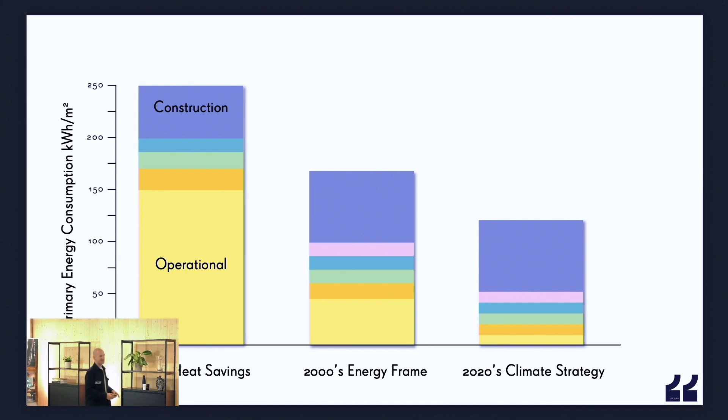And this is a conversation which has been going on for some time. This is not a new thing that's just dropped into our laps. And in the 1970s, so I understand, the conversation was really about operational carbon. So that's about the carbon that we use to heat and to cool and to light our buildings.

And did somebody just put, oh yeah, he did. He didn't pour it out.

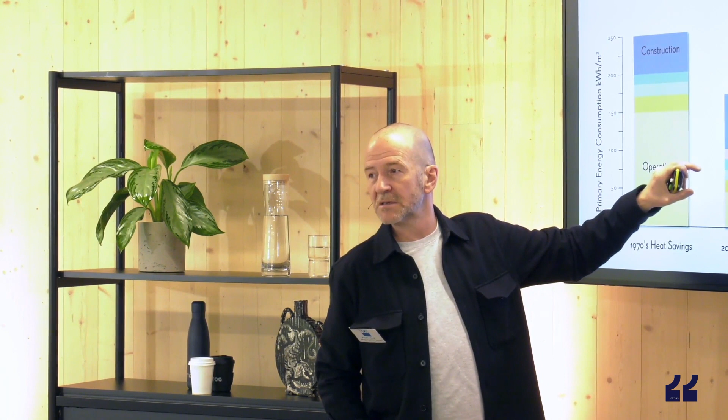So the operational carbon, we got pretty good at saving that with double glazing and with insulation and all those kind of things. And actually now, our building regulations are pretty good for air tightness, for insulation, for double glazing. And our operational carbon, the amount of carbon it takes to heat and light the building, cool the building, has gone right down. And by the 2000s was a much smaller element of the carbon burden of a building over its lifespan. And that's over a typical 60-year lifespan. 50 years in Europe, so I understand anyway.

And then in the 2000s, we really started thinking about on-site energy generation. So solar panels on the roof, the odd windmill, maybe some geothermal, that kind of thing. And again, as our grid has decarbonized, as we've got better understanding of where it's appropriate, when's the right time to do it, we've got pretty good at that. And now in the 2020s, we find ourselves with the operational carbon being a relatively small part of the carbon burden of a building over its lifespan.

But actually, as you can see, the construction part of that's got bigger since the 70s. It's got bigger because of all that insulation and the double glazing and everything else. And now in the 2020s, that's become more than 50%. For a 10-story multifamily residential building, about 60% of the building's carbon burden are the materials and the construction process of building that building.

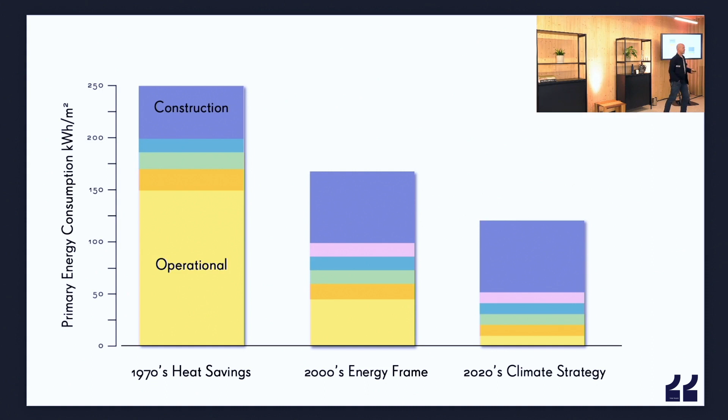But all of our regulation, all of our planning law, all of the things that we award through LEED and BREEAM and all those other things, are focused right down here on this little yellow line. So what we had been thinking about as a practice for some time is how we can begin to reduce this burden, how we can think about the buildings that we need to build and reduce the amount of carbon that we use to do that.

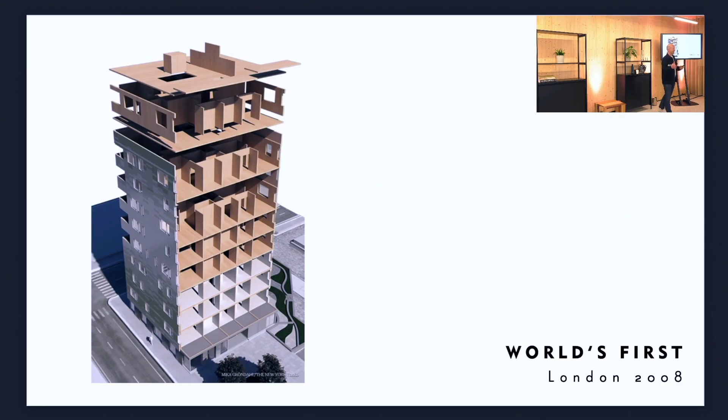And for us, we built our first CLT building, the first one in the UK, in 2003. Then we built another couple of small ones, a house extension, a little private family house. It's just gone on sale, actually, funnily enough. And at the same time, bubbling away in the back of our heads was this notion that this could be a viable alternative to concrete and steel, a structural system that we could use for high-density housing in our cities.

And in 2007, when our industry was building the Olympics, the price of steel and the price of concrete rocketed, and our clients began to look for alternative methods of construction, different ways of building things. And so we were able to successfully suggest to our client at the time that we look at building this out of timber. And so we drew two buildings.

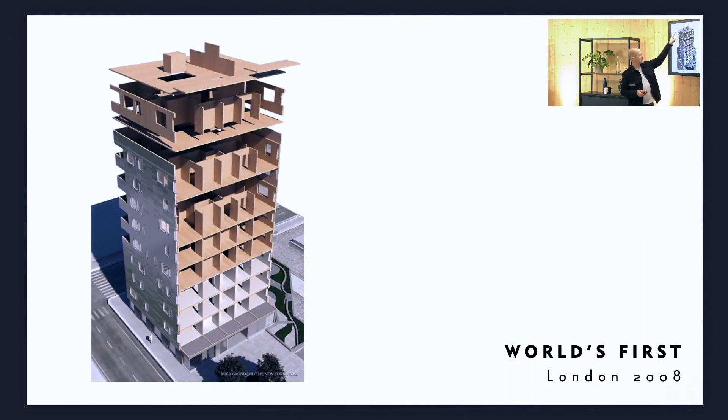We drew a concrete and steel building, and we drew a timber building. And we were able to demonstrate that the timber tower, a timber 9-story building, was less expensive and faster than building in concrete. And so in 2008, after 11 months on site, including demolition, we built this 9-story CLT residential building.

And it was fantastic. It was super fun. It flew up in 27 days. 4 people built the entire building in 27 days. Everything is structural, so that it's like a big honeycomb. So the internal walls, the external walls, the floor slabs, the lift shaft, the staircase, everything working together.

And you can see here the CLT, it's pretty primitive. It's the same depth of CLT on the floors as it is on the walls. We used these galvanized shelf brackets to screw the whole building together. So it's a 75 mil galvanized shelf bracket and 120 mil screws, all through the building. So 4 people running around with cordless screwdrivers.

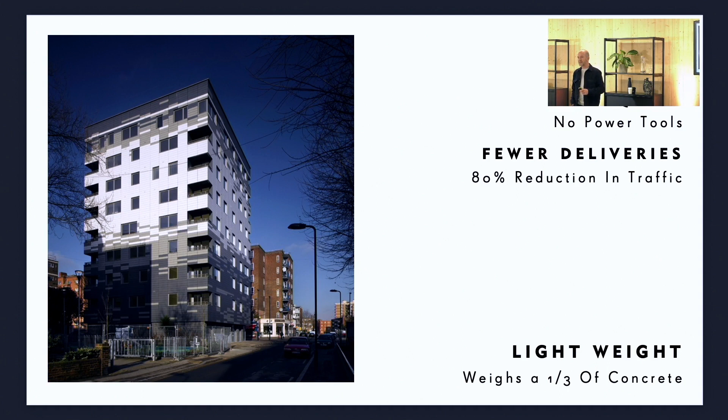And no site waste, because it's all prefabricated, so no skips to site. Very quiet. In fact, you can see we built this building about 9 meters away from the nearest residential home, and no complaints during the whole process of construction. And far fewer deliveries because everything is prefabricated, just plus or minus a few millimeters, that arrives on site, so an 80% reduction in construction traffic.

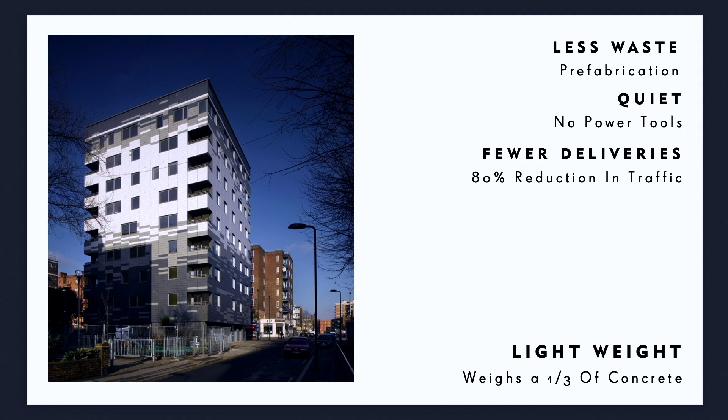And very lightweight, because the structure weighs about 20% of a concrete and steel structure. The entire building weighs less than a third of a concrete building. So we're able to vastly reduce the foundation for that building as well. And it's still there. So we still talk to the residents.

And in fact, the head of Canadian Forests was there just last year, and he phoned us up and said that he wanted to come and see the building. And his secretary had a secretary, which was just how important he was. And I was a little bit late. And when I got there, he told me that he'd been looking up at the building, and an elderly lady had come up behind him and poked him in the calf with a walking stick. And when he turned around, she pointed up at the building and she said, "It's all made of wood." And then walked off.

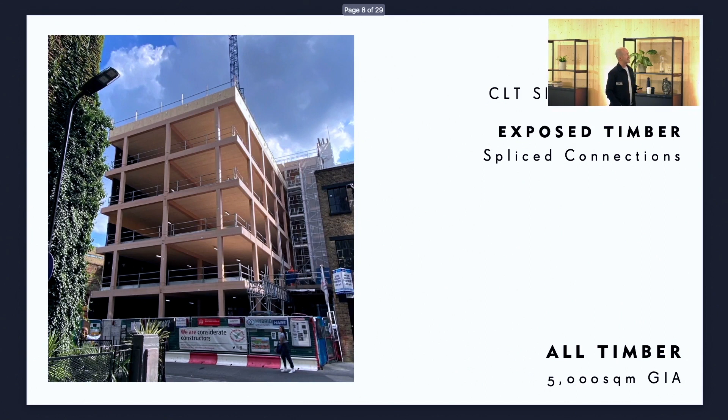Oh, no, this one. So this is what I'm talking about today. So this is the black and white building. Welcome to the black and white building, which was completed just before Christmas for the office group. This building is a 5,000 square meter gross internal building designed for co-working space. And the entire building from the ground floor slab up is made of timber.

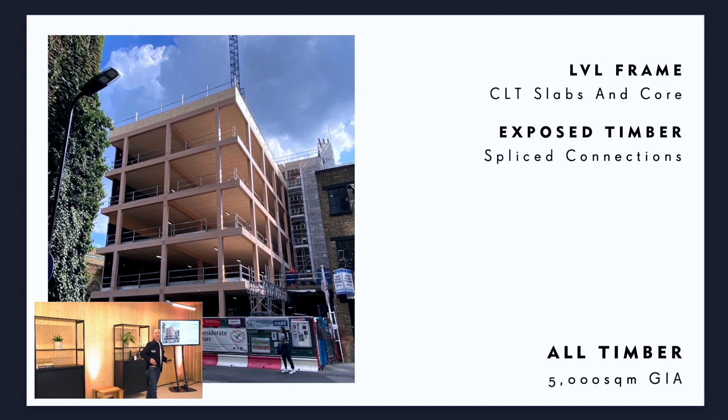So it's a timber frame, timber floor slabs, timber core, timber external party walls, timber curtain walling, and then timber solar shading on the outside of the building. So 4 different types of engineered timber. You can see the frame here. The beams and the columns are made from LVL. And LVL is laminated veneer lumber, so that's like plywood.

So if you imagine, if you plank a tree for the CLT, which you have up here, this is made of planks glued together. When you make a veneer, you put a tree trunk on a massive spiralizer. You spin the tree trunk at great speed, and out comes the veneer. And so you get 100 plus meters of 3 millimeter veneer. Then you slice that up, and you stack it up with adhesives, and then you put it in a press.

And this is made from beech trees in Central Europe, from near Frankfurt. And it's 2.9 times stronger than concrete in compression. So the beams and the columns that you see have an inherent fire protection. So we're below 18 meters as a building. So the 60 minutes of fire protection that we get from the beams and the columns is actually within the charring of the beams and the columns themselves.

So what you see in the building is completely what you get. So the tectonic, if you like, how it's all put together, is completely evident to you when you see the building. And then we have CLT, cross-laminated timber, floor slabs. And as I'm sure you all know, CLT is made from secondary grade planks from the outside of a tree, outside of a European spruce tree

generally. And those planks are laid out, they're sprayed with a PVA adhesive, which is like a water-based, Copydex kind of plasticky adhesive, and the next layer comes on top, perpendicular, and you build up in odd layers. And these are a 5-ply panel, and they're about 140 millimeters deep, although that varies depending on the span. And in this building, we have spans of between 6 meters and 9 meters across the building. And I'm probably going to come on to this in a sec. There you go.

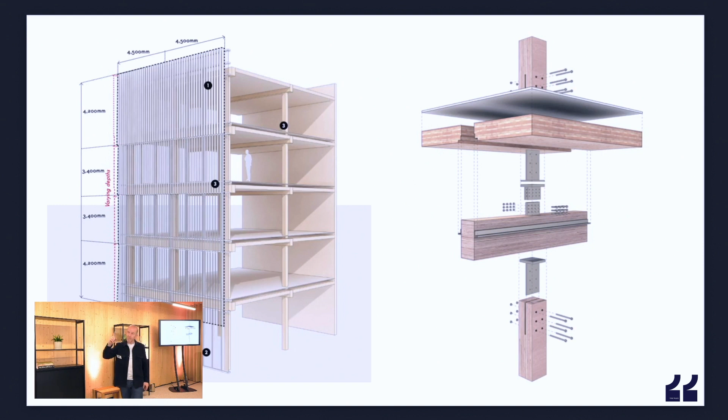Now, a timber building, as I've said, the structure is 20% of the weight. So you're not really worrying as much about how you hold it up, as much as you're worrying about how much the wind is affecting it, how much the shear forces, the racking of the building is happening. So what we're always thinking about is generating a structure which is as lightweight as possible, but which is compensating for those horizontal forces.

So what we've done in this building is, if you look at the edge here of the slab and where it is on the beam, the slab doesn't sit on the beam, the slab sits within the frame of the beam. So if you imagine you have this open skeleton of this lightweight structure here, and that you place the floor slabs within the skeleton to lock that skeleton tight. Does that make sense? Good, okay, getting nods.

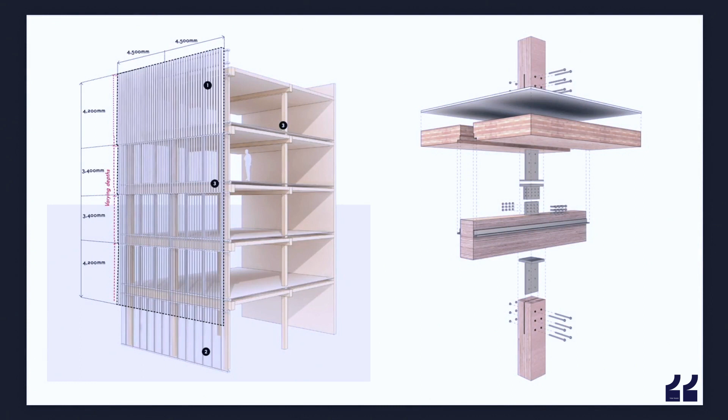And then where the core is placed also is part of that resistance, so making sure that the core ties back into all those floor slabs. And by doing that, by really designing from the inside out, by making the engineering core to the design principles of the architecture, we're then able to vastly reduce the amount of timber that we use. So we use about 40% less timber per square meter than we used on our first office building.

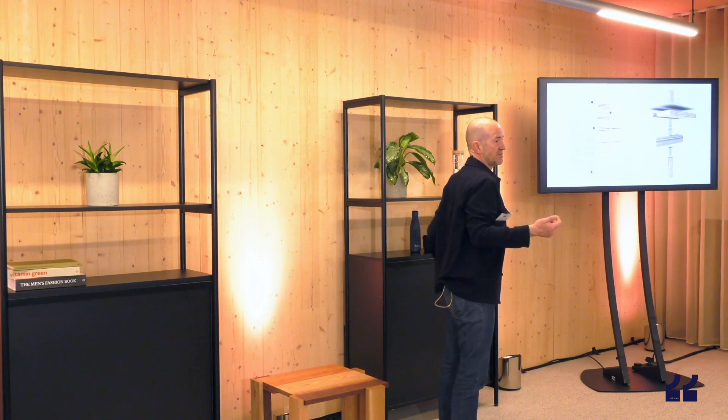So we're always looking at ways in which we can reduce the amount of timber that we use in the building. And that's both from a cost perspective, but also just reducing the amount of materials that we use in general. So the buildings that we design, as I think you can see from this building, are quite simple buildings. They're buildings which aren't ostentatious, which don't have excessive or exuberant massing or form or use of materials or triple height spaces or anything.

They're quite calm buildings. They're buildings that understand the engineering principles behind the materials that we use, and they're buildings that recognize their impact, that understand that this is a new age. So for us, it's not just about a material, not just about reducing carbon, but also thinking about a kind of cultural shift, if you like, in the way in which we approach the materials that we use, the things that we use in life.

Anyway, that's a drawing of it. So you can see really simple, and all the steel connections that tie the beams and the columns together are buried within the timber itself. So the timber acts as fireproofing for all those connection details. And you can see we've also got sprinklers in the ceiling here.

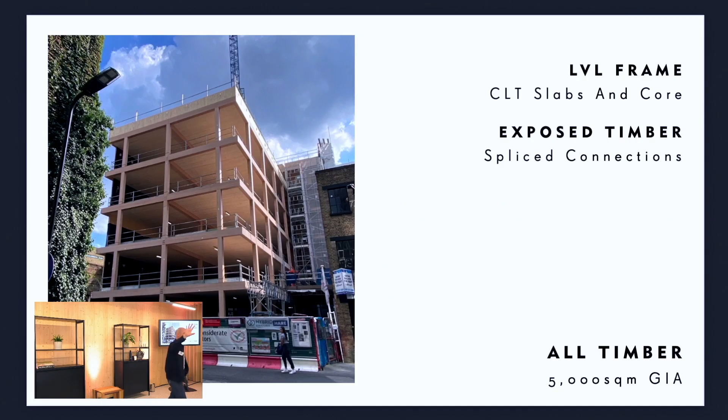This is a misting sprinkler system, and those are not for the timber, they're for the windows, because we're very close to our neighbors, as you can see. So we're so close that we would have needed fireproof glazing. So it's more efficient to have sprinklers than it was to have fireproof glazing.

So here you can see the timber being delivered, and where you arrived on the pavement outside, that's where the trucks pulled up. The timber was lifted out by crane, 872 pieces of timber in the building, each one of which had a QR code or a barcode on. That barcode was read off and understood exactly where that piece of timber was going to be placed on site.

So a very precise process, I don't want to say slow, but an exact process. So you get this different culture in the process of the construction, which is one that's about care and attention and precision and placement. There's no banging, there's no dust, there's no grinders or jackhammers, it's a very different process. So you can see each one of the beams here being lifted carefully into place.

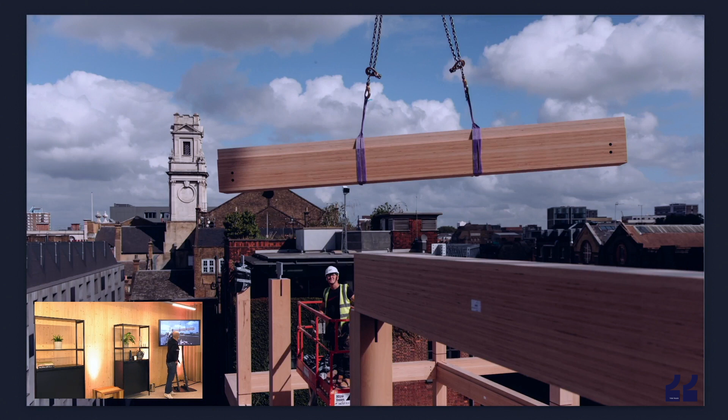So everything is prefabricated before it comes to site, because after you've left here, you can go and knock one of the columns with your knuckle, but do it gently because they're really tough. You can see that working into these beams and columns, working into the CLT, is something that needs to be done in the factory beforehand. So everything is designed completely with a digital twin. The whole building is designed fully before it arrives on site. And yet, because it's timber, you have that opportunity for adaptability as well.

So this is the building site here. You can see the truck will just arrive at the front here. The crane, where the light well is over there, is taking the pieces, stacking them up here, and then lifting them over to the back of the site and building up the core. So the core was our site access staircase. The timber staircase that you go up and down now, just before Christmas, that was a site staircase with contractors running up and down there with scaffold poles and everything else.

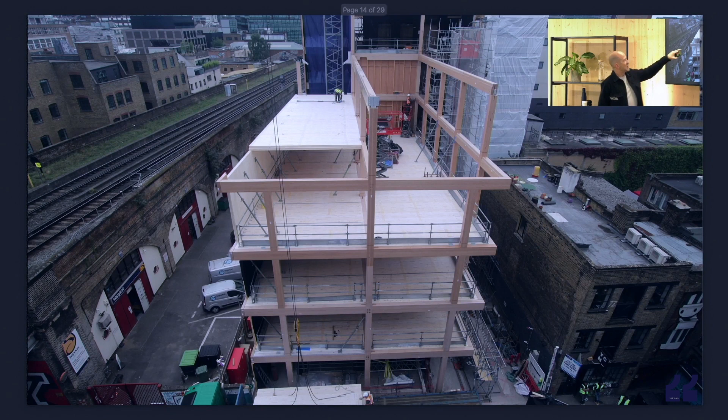So you can see here the frame going up and the floor slabs fitting within that frame. And this is the curtain walling. The curtain walling comes from Sweden and is made from offcuts from glulam manufacture. So you can see all short section glulam. So it's kind of a byproduct, really, of glulam production.

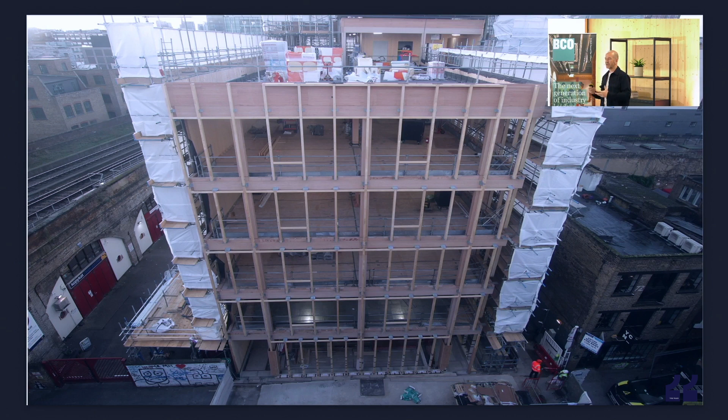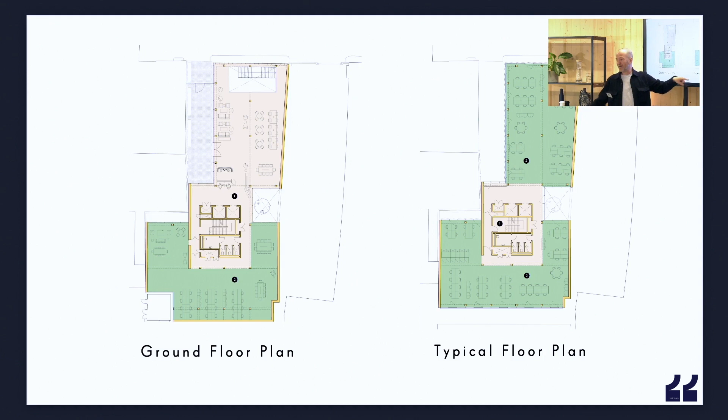So you have this kind of, you can tell I'm a walker. So it's what's the perambulatory? Need to practice that word.

One of the other things as well, and I know that for lots of people talking about timber buildings, insurance has become an increasingly difficult issue. So one of the things that we do as a practice is to engage with our client's insurance broker very early on during the design process.

And in this situation, we talked to the brokers in stage 2, talking to a number of different brokers, a number of different underwriters, and realized that actually their main concerns are not fire as much as water, so long-term water ingress. What will happen to the building if there are leaking taps, flooded bathrooms, broken pipes, that kind of thing. And there's, I think, a notion amongst the insurers that the bathroom will flood, the floor will go rotten, it will collapse, and the building will fall down on top of it.

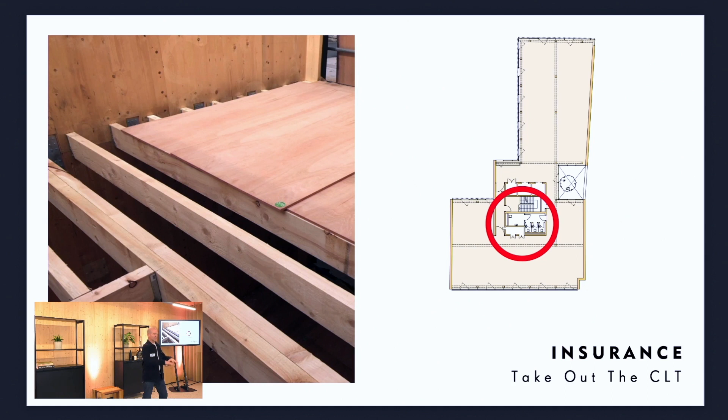So we have to dispel these rumors, take them through the design process, and really reassure them that there's a competent design team who know what they're doing, who've done this before, who are taking really careful care and attention to the design of the building and the construction process. And that's understandable because this is a new way of building. This isn't simply taking the concrete and steel out of the scenario and replacing it with timber. This is a completely different way of building.

To do these buildings successfully, from the design process, from thinking about the architecture in terms of the engineering from the inside out, thinking of the building as a series of components which are then assembled on site, to the process of construction, to thinking about fire, to thinking about water ingress, all those issues mean that we need to approach these buildings in a different way. And to satisfy the insurance industry, I think we need to demonstrate competence as an industry. We need to demonstrate that we have the right fire engineers, the right structural engineers, the right architects even.

So what we did in the bathrooms, which stack all the way down the core, we took out the CLT floor slabs and replaced them with joists and plywood. And the insurers are like, oh yeah, joists and plywood, that's on our list. That's okay, can do that. And you know what? We'll never put CLT in a toilet floor again. Because you don't need to. It's expensive. It's much more efficient to put plywood and joists in the toilet floors.

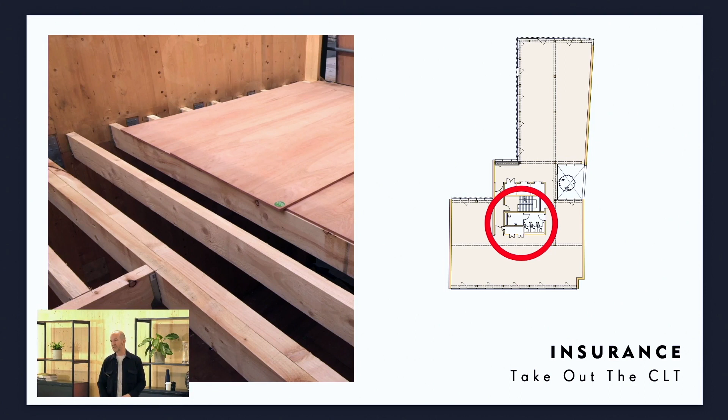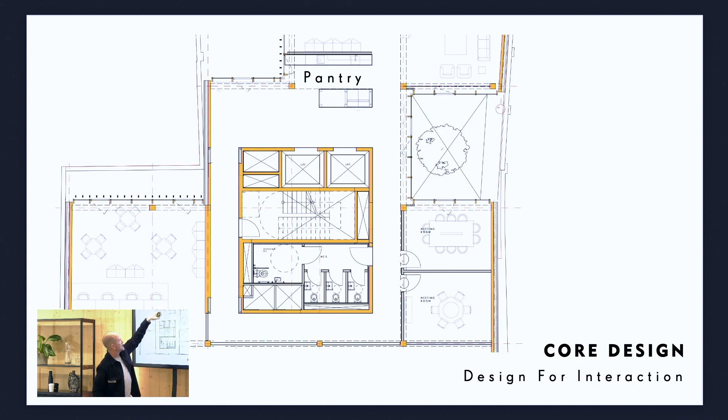So there you see the whole core where you walk around. You've nearly always got daylight at the end of every route, at the end of every walk. And then when you come out of the lifts, you have this kitchen in front of you as well. So the core doesn't become something that's hidden, in the corner, or a dead space. It becomes an active part of the building. And what we understand from the people working downstairs is that people catch the lift up, but they always walk down the stairs.

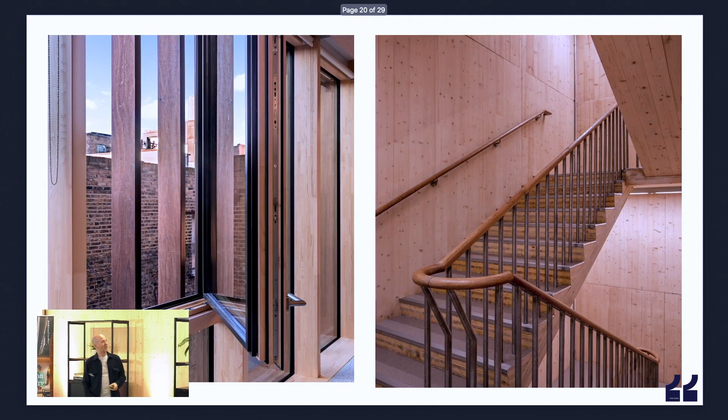A lot of the benefits that we're beginning to understand about a timber building are not only the carbon benefits and the construction process benefits, but also the health and well-being of being in a building like this. So there's now clear data from Europe which says that if you are sick in a timber hospital, you get better quicker. If you're educated in a timber school, your concentration levels are better, better productivity for school children, etc.

And when you work in a timber building, you tend to work longer hours, you stay with that employer for longer, you're more satisfied in your job. And when you sleep in a timber building, you're supposed to sleep for longer. I sleep in a timber building, I'm not sure about that.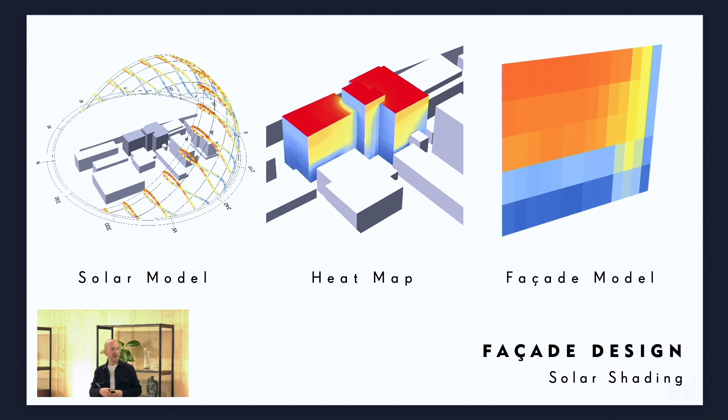So just say something quickly about the solar shading on the outside of the building. We put a model of the building into a sun path diagram, like this, into a solar model. We heat mapped the outside facade of the building, and then on that heat map, we modeled the solar gain into the building. So to maximize the winter solar gain and minimize the solar gain in the summer, the solar shading that you can see on the outside of the building, which runs vertically on the east and west, and horizontally on the south, allows us to have almost completely clear glazing.

So the glazing that we use doesn't have any E-coating on it. It has a slight tint, but that allows us, I think, to have this much more domestic atmosphere within the building. Because you've got this clear glazing, I think you get a better response to the material itself, a better response to the timber, and you get a much calmer and more friendly domestic interior to the building as well.

The other thing, of course, is that if you don't put an E-coating on glass, then you can recycle it. And as soon as you put an E-coating onto glass, then it's landfill. So all those buildings that you can see that way, that's all landfill. Depressing, isn't it?

So the tulip wood that we use on the outside of the building is an American hardwood. It goes through a thermal modification process, which is basically you boil it in sugar beet juice for about 3 days. And that gives it amazing longevity, so about 50, 60 years of lifespan. And we also impregnate it with a fire retardant as well. So that's a hardwood from the United States.

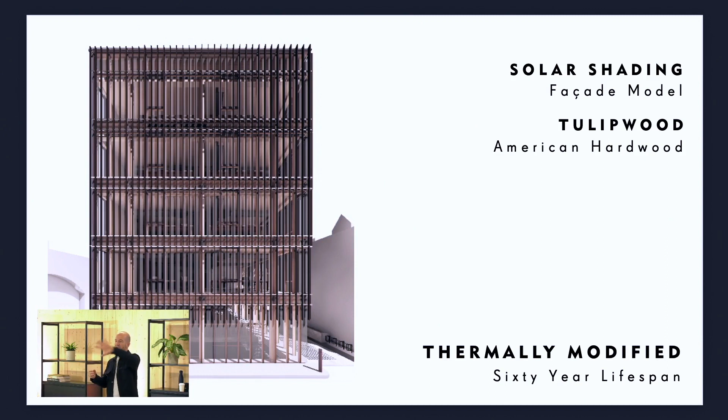The reason why we use that timber is because, quite sadly, it has a really small root ball as a tree. And it used to grow all over America. And since the climate has begun to change, especially in the United States where wind speeds have picked up, they've all blown over. There's warehouses full of this beautiful, strong hardwood across the United States, and they're making cardboard and pallets out of it. So we've been working with the US Department of Agriculture for some time, thinking about how we can use this timber in different ways.

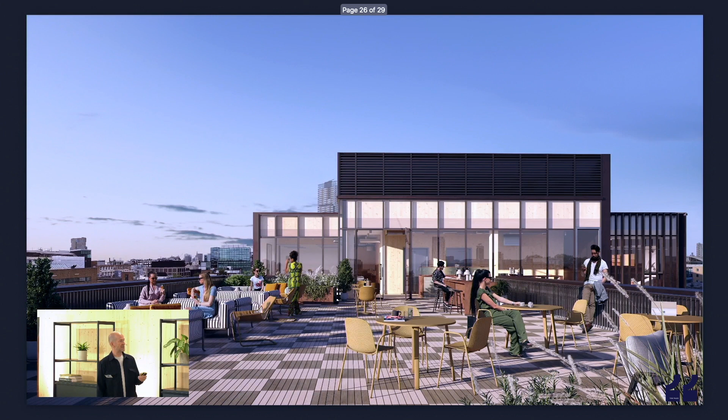So you can see that across the building. I think we have about 8 different depths and frequencies of solar shading across the building in order to maximize that solar gain in the winter and minimize it in the summer. And there's our roof deck there in the summer, something to look forward to. There, that's the CGI of the building for planning. So that's always fun to see what it looked like at planning stage and what it looks like now.

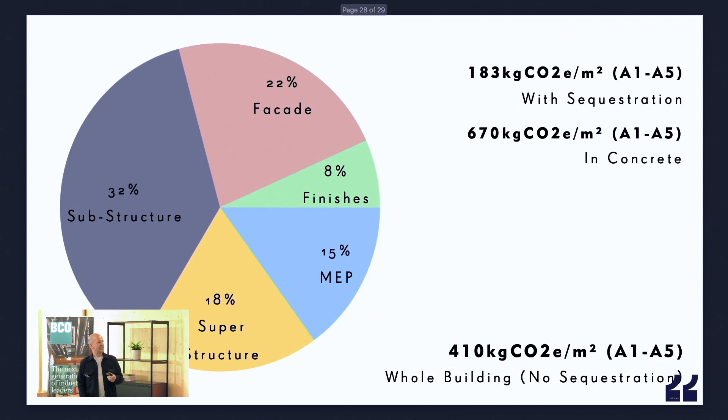So in terms of our carbon, just quickly, and this is something that we do through the whole process of design in our practice, is to look at the carbon. Oh my goodness, look, all the cameras coming out. Is to assess the carbon as we're going through the building. So you can see that the RIBA and LETI targets for office buildings are, I think, 600 kilos A1 to A5, and we're at 410 for this building.